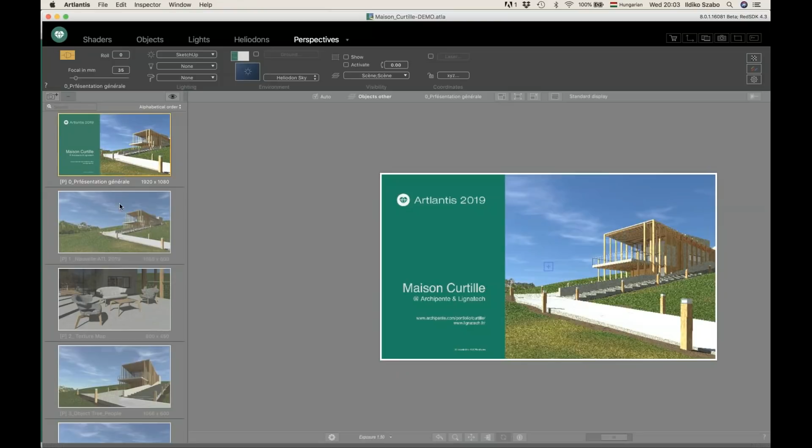So let me switch to Artlantis. Here you have the same house in a beautiful environment. So anybody just sitting on this terrace can admire this landscape. Magnificent mountains are surrounding the house. So here it is, our building that helps us to generate the presentation, and first of all, to speak about the new features of Artlantis 2019. So my presentation will focus on the novelties first of all.

So the first and very important novelty is the name change. And what is behind this name change? Because so far we always said that Artlantis is a product line composed of Artlantis Render and Artlantis Studio. Now these two products were merged together into one single product, which is called Artlantis 2019 and groups all the power of these two applications.

What makes it different, let's say, is this little list we can roll down with the different presentation types we can do. And here we will find all presentation types, starting from perspectives, parallel views, panoramas, VR objects, and animations. You may note a new inspector called Insertions, because the site insertion tool was reworked again. It got a separate independent palette as an inspector, so it will have its own content. I will present it to you later on. So this is Artlantis 2019, so let's see what novelties it brings to us.

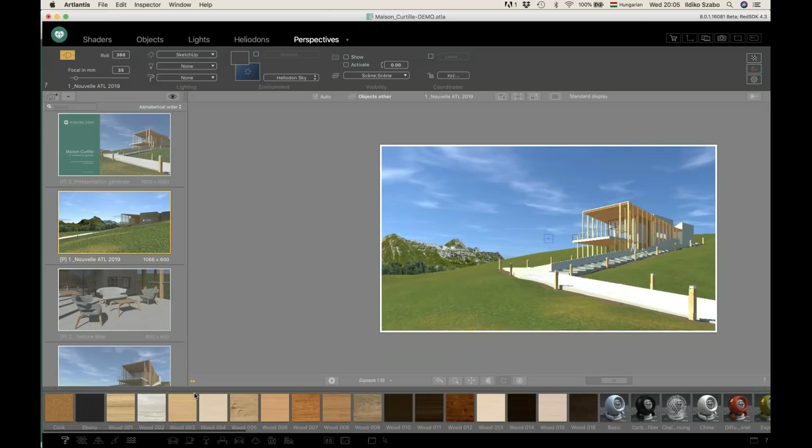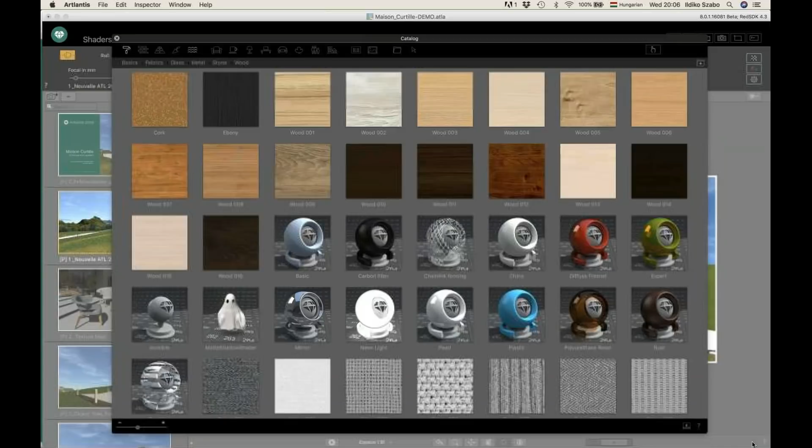Each version has a core feature, something that developers are focusing on, and this time it was the catalog, the library of Artlantis and the content of this library. So let me open the catalog first of all. Let me enlarge this little window and I start to browse it. This is the basic library. And what I'm browsing here is the standard library of Artlantis 2019. So I will enlarge it even more, open it in a separate window to let you see more of this content.

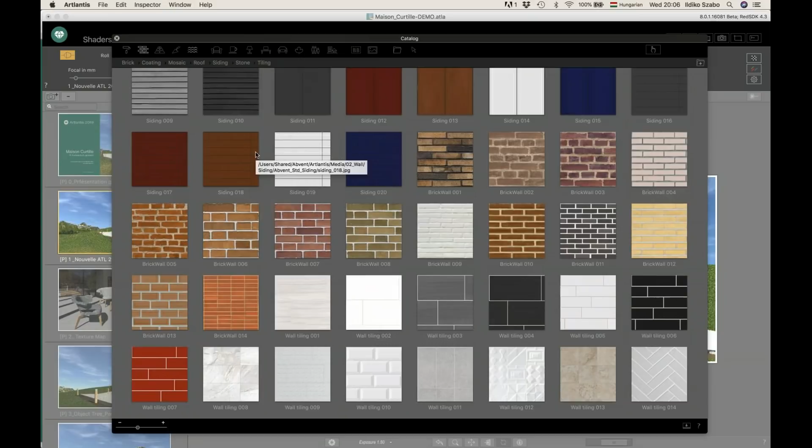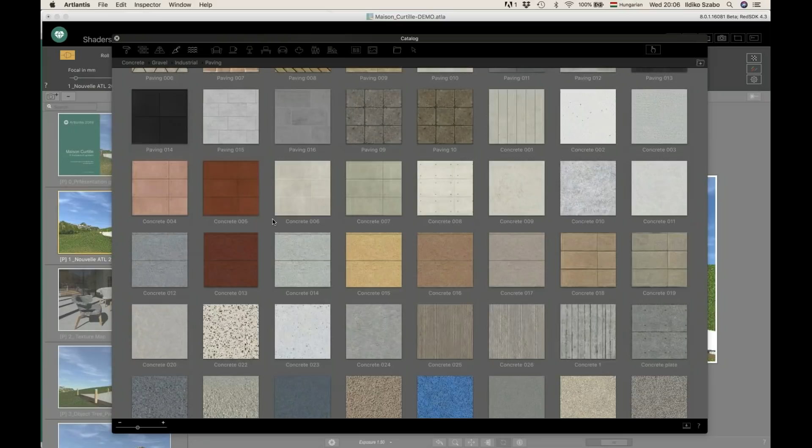And just to repeat, this is the content of the standard basic library. So whenever you download the fully functional trial version for 30 days, it will be the content you will have access to. So this is the content of the default library of Artlantis whenever you decide to purchase Artlantis. This means that altogether we have about 1,000 library parts, which is an improvement of 40% compared to the previous version. So let me compare it.

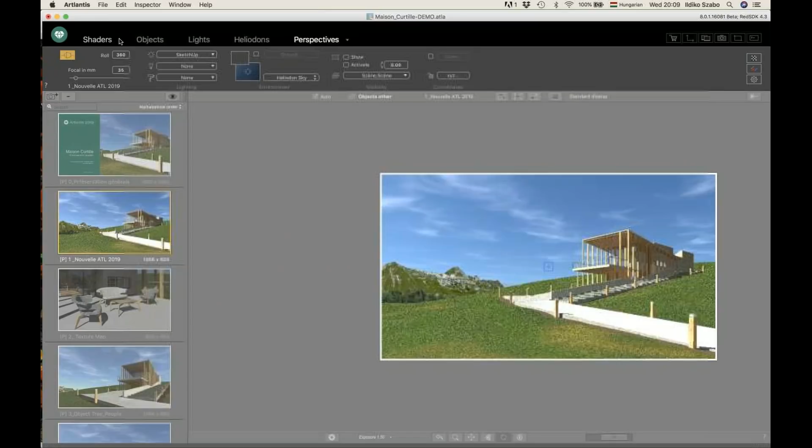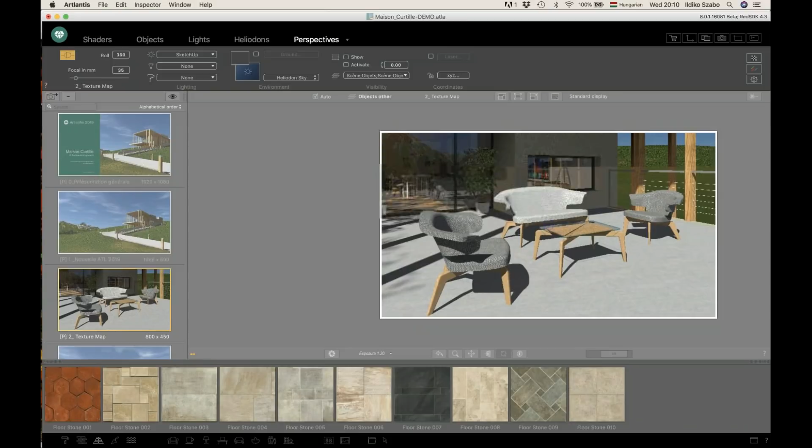So let's see what Artlantis provides to us and how it works. I'm going back to Artlantis. I will close this window of the catalog. However, I will keep the catalog open at the bottom, choose a different scene, the scene of the terrace, and open a category with some shaders we can map on surfaces like this terrace, and open the inspector of shaders. And of course, to apply the shader, it's a simple drag and drop.

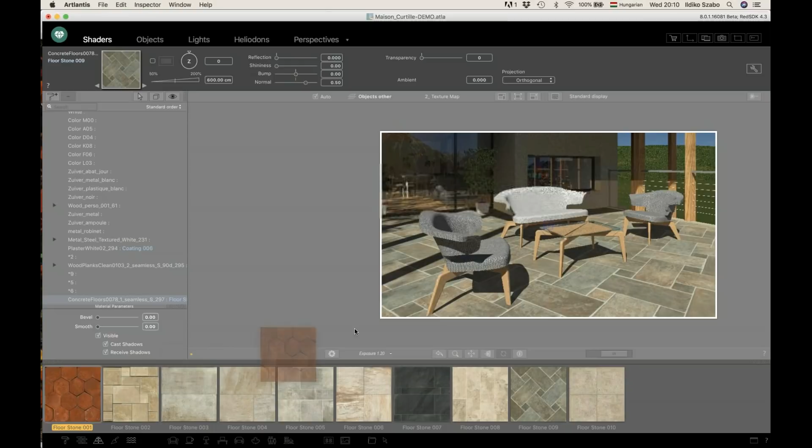It is mapped on the surface. I can do a different shader. The quality of the shader is the most important here, because if we check the inspector, nothing has changed. The settings are the same, and there are no extra settings to see. But the quality of the shader was reworked, and now they are much more realistic and look better in our rendering. Only those shaders which have a texture map for the diffuse were subject of this development job.

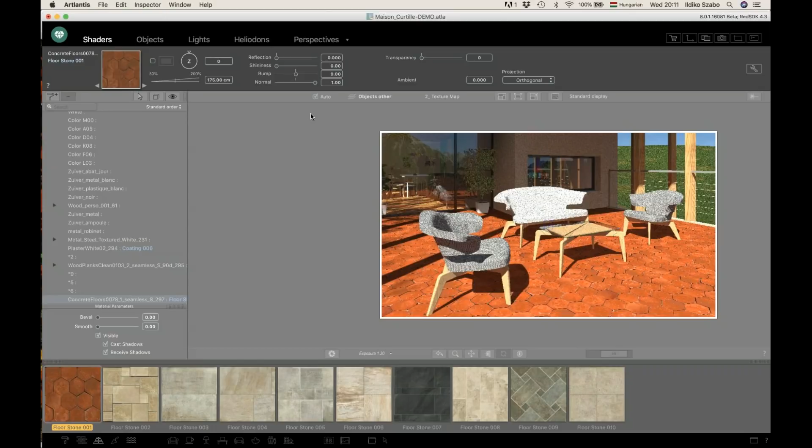It means that all those shaders being a combination of colors, the so-called procedural shaders like the glass material or the basic shaders, or think of a certain aluminum or whatever, those weren't changed. Only those having texture maps for the diffuse, and of course different combinations of textures to generate different maps and different settings, were reworked for this version of Artlantis. And after presenting the shaders a little bit, the next topic will be about the trees.

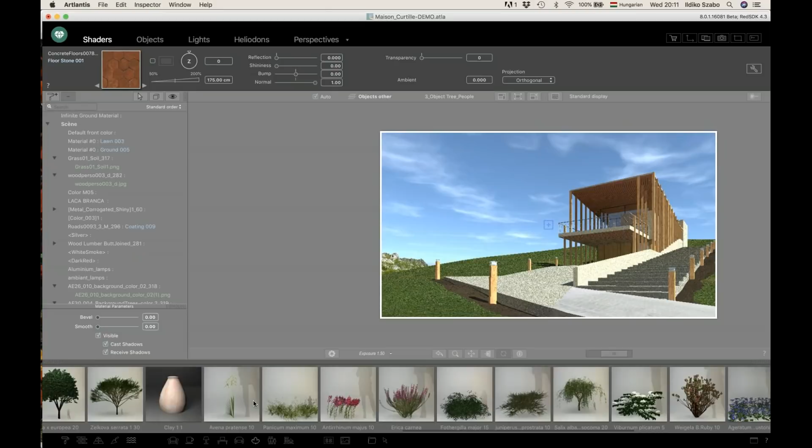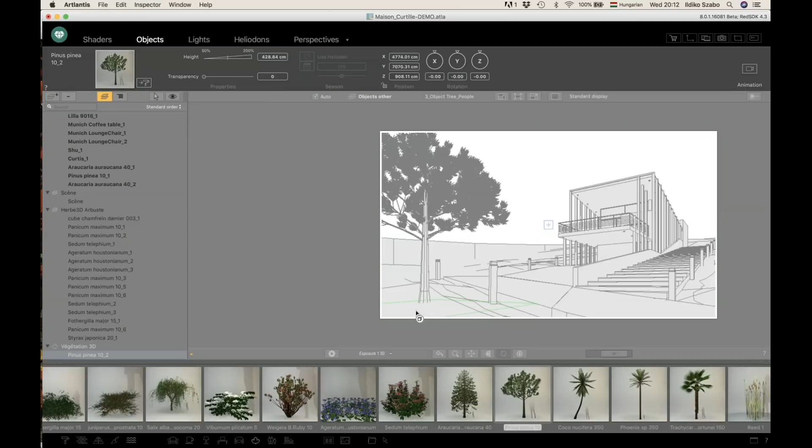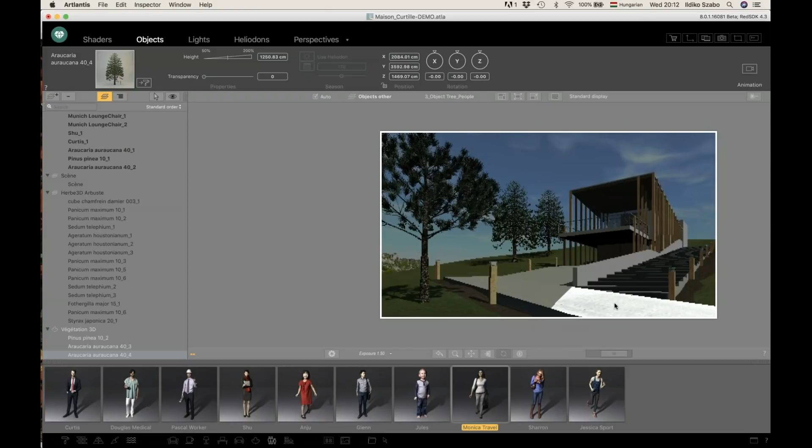I will open up now the catalog, the standard library of plants, and open the inspector of objects. Whenever I'm dragging and dropping an object into the scene, the inspector will feature the settings, and these features didn't change at all, because the object itself was reworked, and it is now more lifelike, more realistic. So I can simply add these trees, or I can add even people, enhancing quantity and quality. The section with people, the same. And the people are now high quality, nice persons belonging to AXYZ.

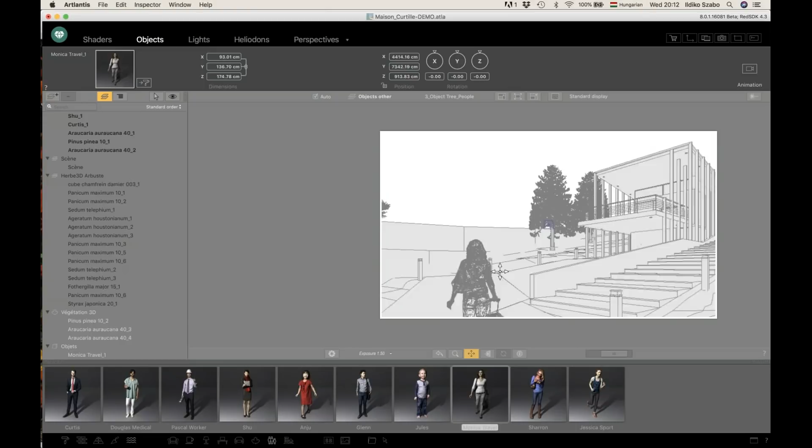Just trying to find a camera view where we have a closer look at this lady to show you the way she looks, her geometry, the texture mapping on the lady. It's a nice person that looks realistic in our scenes. So this is about the content, about the library parts one by one.

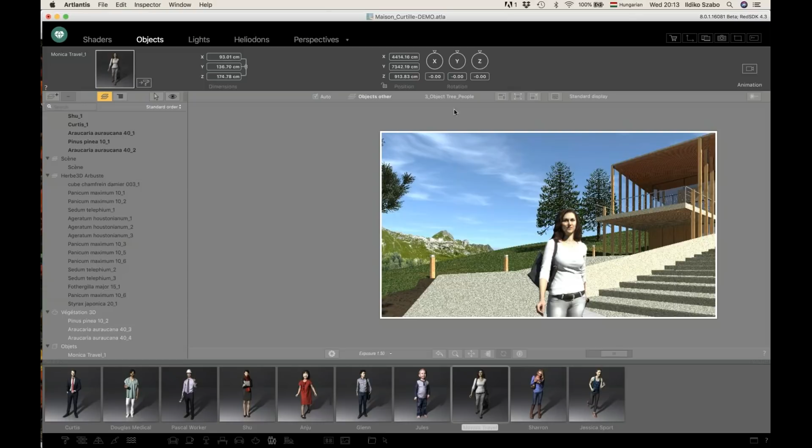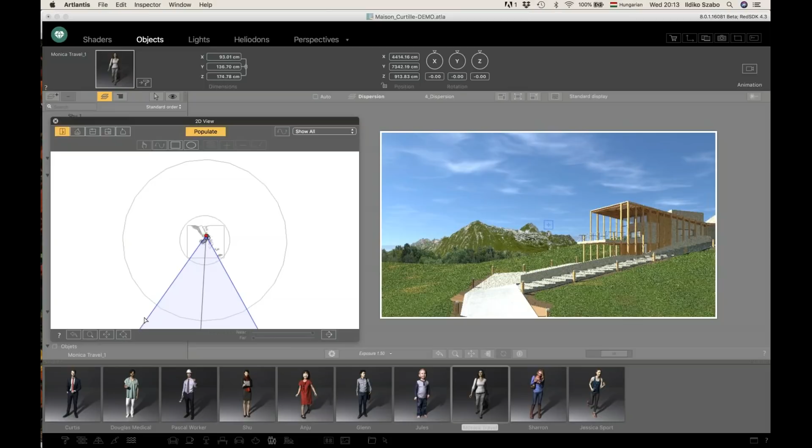And now let me show you a feature that is also linked to the objects, to the way these objects can be distributed in a scene. For this reason, I will open the 2D window and show you the feature for distributing the objects, called Populate. It's an icon that should be activated first of all, and when it's activated, a list of icons will appear below this feature. So what shall I distribute for this scene? Some plants first of all.

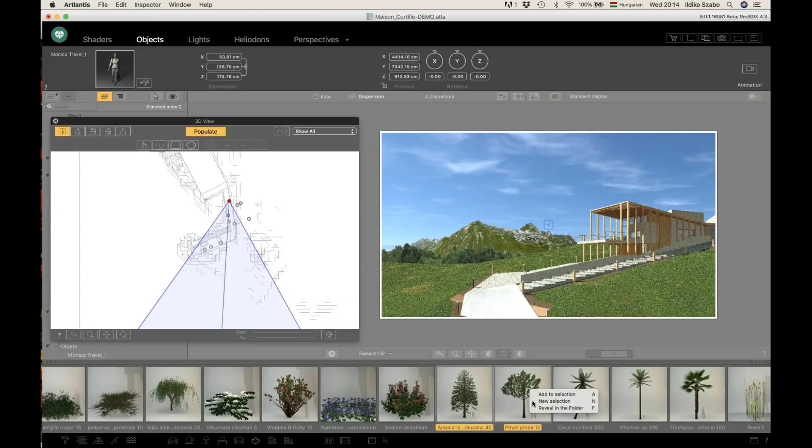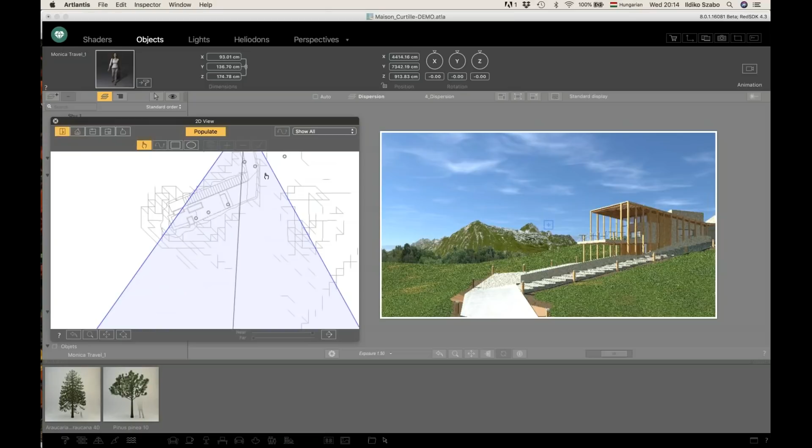So let me go into the plants section of my library and search for some pine trees. These are more appropriate for this region. Select from my library, create a new selection. So here it is, my selection with these two plants, and with the help of the Populate tool, I have multiple possibilities to distribute these objects in my scene. The first one is a finger. Let's choose this. It means that wherever I'm pointing, one of the selected items will be added to the scene.

I have the possibility to generate a spline. The spline is a curved line that I can edit, and then I can follow whatever path I would like, along which I can distribute these objects. I can have a rectangle, oval. Let's go for this shape that can be edited, changed. Now I'm looking for a shape like this, positioned in this way, inside which Artlantis already suggests a number of copies.

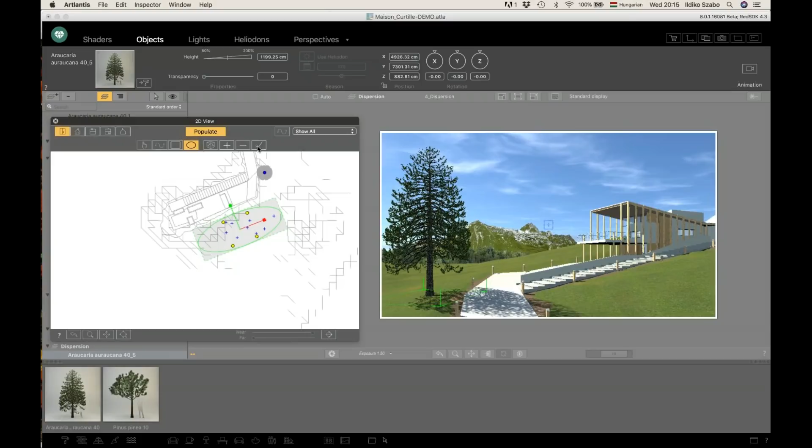I can add more copies to this. These blue crosses represent the objects I'm adding to the scene. And if the distribution doesn't suit me, then I have a dice. I can reorganize them and click OK. Let's go. And here are the plants appearing in my list.

Okay, let's delete the one that's not set correctly. So this is the populate tool of Artlantis.

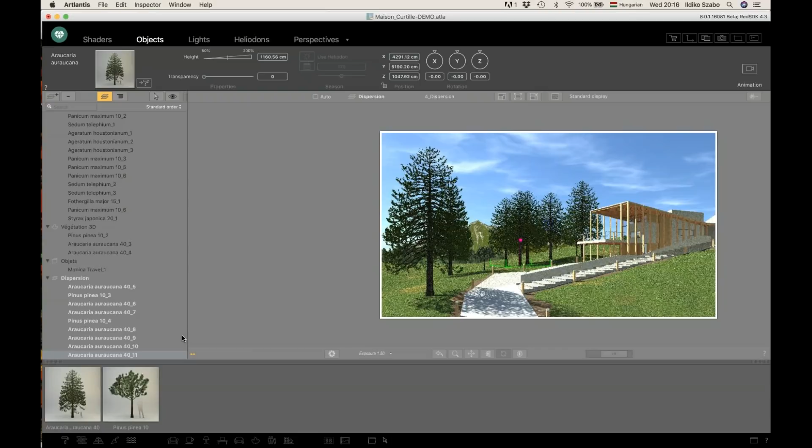You can use it to distribute whatever object you wish in your scenes. And now the so-called 3D grass, which is part of the category of shaders featuring natural surfaces.

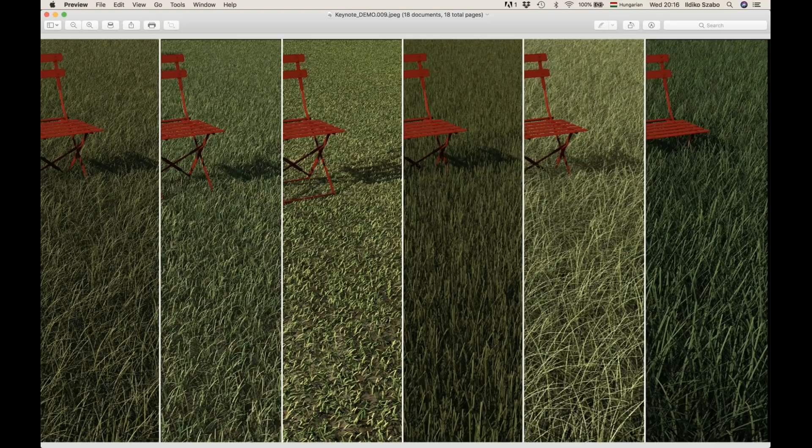Here there are 6 different types of grass we can map on any type of surface. Let me show you the way they look in a final rendering. So here are the 6 different grass types rendered separately. You can notice that the height of the grass is different.

Because there are different types of grass, you can name it, the color and the shape and so forth, the type of it. When you drag and drop it over a surface, you will be able to manage the height of the grass, so two settings only, the height and the kind of fall off. Depending on the distance from the camera, you can simplify with this fall off the calculation of the grass.

So it's very simple. The reason why I'm showing you renderings with this 3D grass is that they cannot be displayed in the preview window. They cannot be previewed actually. Whenever you drop it over a surface, you will see even color, nothing more.

Just to spare computer power, we decided not to show the 3D grass in the preview. So therefore, the preview will keep the speed of refreshment. However, in the final rendering, you will see the grass nicely calculated, like in this scene.

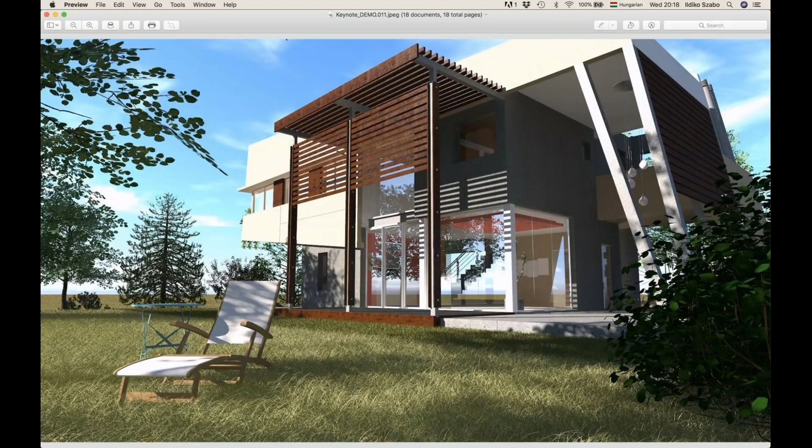Here is another example with this 3D grass in the courtyard, close to the camera in front of the building. So the 3D grass has its own role whenever we need some details in front of the camera. This is to avoid putting it on large surfaces that can even charge too much the calculation afterwards.

So it really is a very realistic, nice feature that provides finally the most expected, anticipated 3D grass, and the way it was anticipated. So we are really happy to present you this 3D grass.

And if you take a look at this rendering, the whole plants are coming from the standard library of Artlantis. Maybe you remember those lime trees, which had very whitish leaves. They were too shiny even. They also are part of the standard library, but in this reworked format.

The flowers, the different plants here and there are coming from this standard library. So you are welcome to use it to set up nice scenes for yourself.

And with this, I'm closing this big chapter around the catalog. So we spoke about the quantity of the catalog and the quality of the objects, and even about the feature, how to distribute these objects in our scenes.

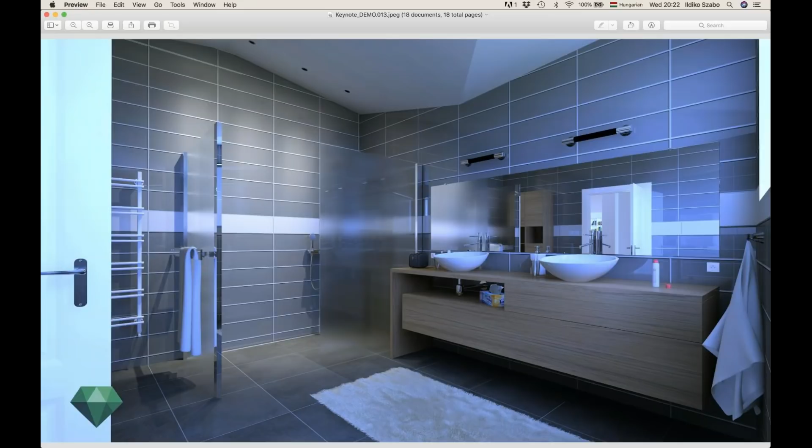So let me switch back again, now that you know what it's about, and maybe you have a better way to understand what to look at now. Here is Artlantis 7, which is a bit dim compared to Artlantis 2019, where each surface having its own texture, the contrast of the image is more improved and it's more realistic.

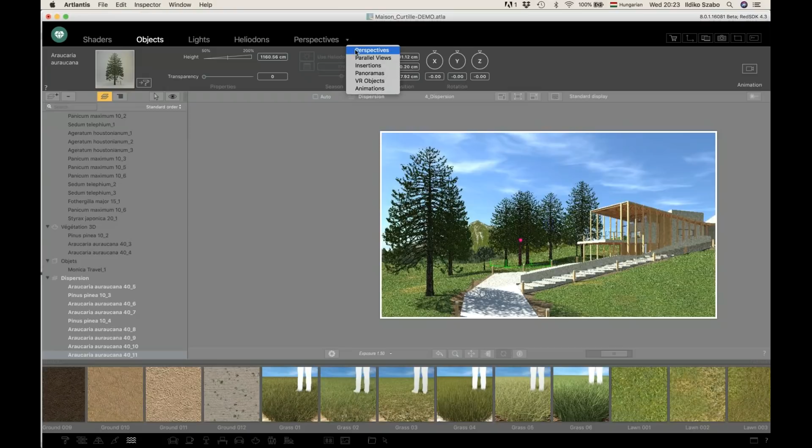Okay, let me go back to Artlantis and continue the presentation with the so-called site insertion. So I'm rolling down this little list here, and among the presentation type, now I can choose site insertions. This is the name of this new inspector.

I will close the catalog. I don't need it actually, because we will concentrate on the new reorganization of this existing tool in Artlantis, which is still about the same question. My little building, I work on it. I'm very anxious to make it nice and good in all its details, and wow.

However, the clients are very curious how this building will look in its future site. Therefore, this site insertion tool of Artlantis would like to become even more handsome and easier, to make these site insertions lighter for us.

The inspector has some tools which can be retrieved on all inspectors. We can customize our insertions based on light, choose an existing sun type, artificial light, and so forth, activate or hide some layers, organize objects, and activate the infinite ground.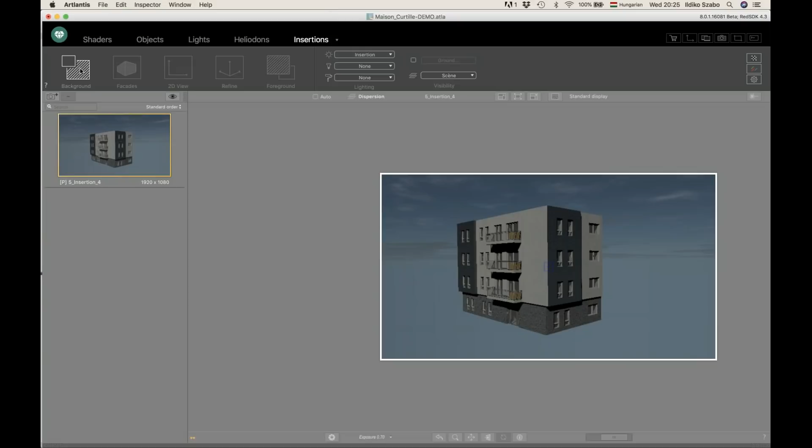So far, we know this. The new part of this inspector is this list of icons, from which the first one is active. This is on purpose, because the developers and conceivers of this interface would like us to follow a certain logic, and the first icon is where we should start.

This icon will ask us for a background image. Let me browse my hard drive for a background, a photo I took with any camera, mobile device, telephone, whatever. It can be an average JPEG, and I need it entirely.

We shouldn't crop it, because even the proportions of the image are taken into account. So let me apply it as a background. Automatically, the adjustment, the proportions of my preview were stretched to match the proportions of this background.

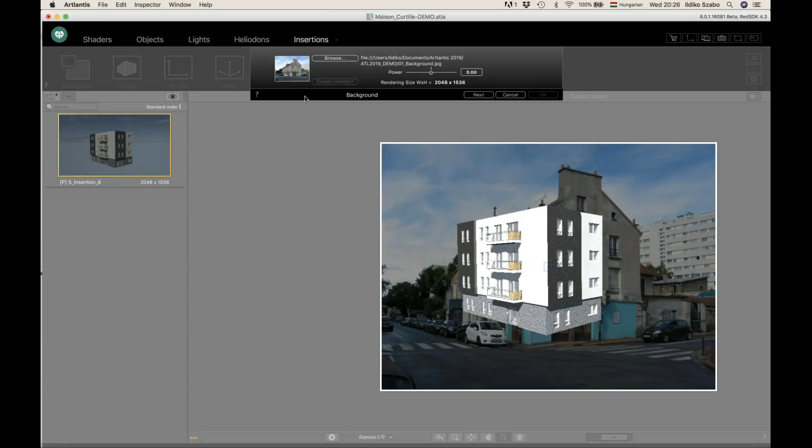So some automatism was added. Every feature that so far we had to click separately is now applied automatically, having its own separate inspector. It can become an automatism.

We can still continue to work out the color, I mean the brightness, of the background. And if my photo contains enough metadata, then this 'create heliodon' icon turns active, and clicking on it will generate a new heliodon in my list of heliodons, which has the same position in the sky and hour of the day set automatically, like in my photo.

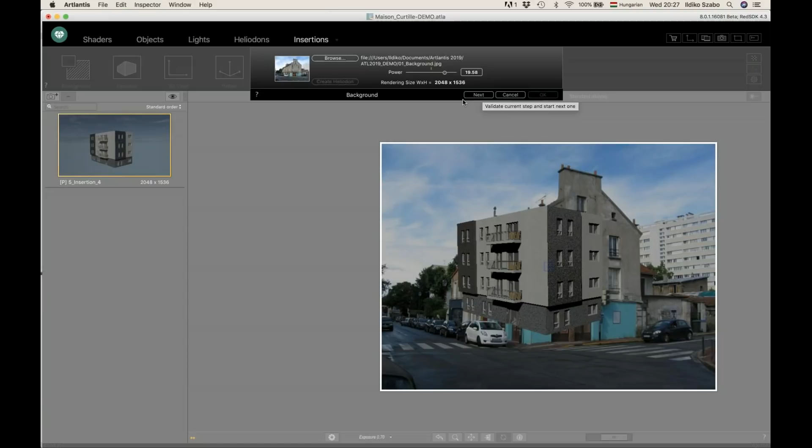That makes it easier to let my model end up looking exactly the same way as in my background photo. My possibilities in this palette dialog are the next button and cancel, so I'm forced to go to the next tab. The next step is to set the XYZ coordinate system in the preview.

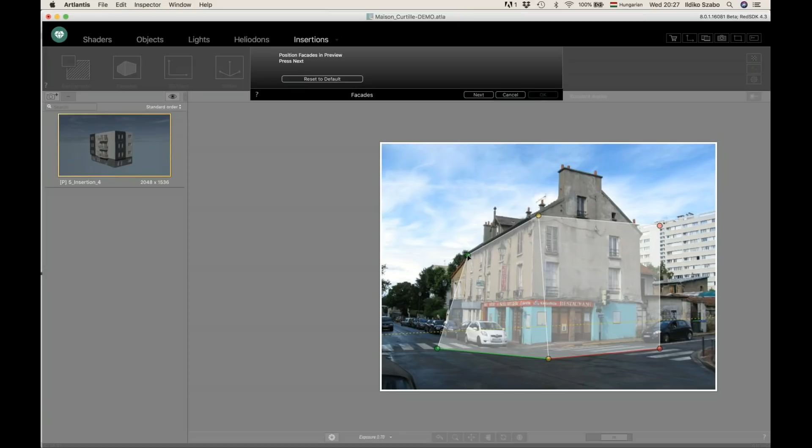To make it even simpler, there is a kind of net to position the origin point, which I can retrieve afterwards in the 2D window. With the help of this net, I'm just trying to fix a kind of bounding box for my building.

Over the perspective lines of this background. It was done, that's all. What shall I do next? I shall continue. Next, the 2D window opens up automatically, where I also have the XYZ coordinate system.

Let me get closer to the model. What I shall do is position it and rotate it exactly the same way as in my preview window, where I have clearly visible the XYZ axis.

And of course, I have to check the positioning of my coordinate system in all views, at least two views, to make sure that it's positioned at the same level, the origin and the rest are also fine.

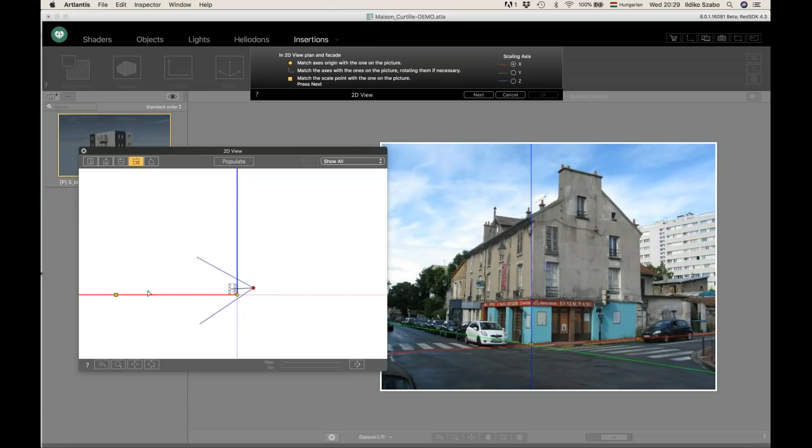The list in the dialogue helps me. If I'm lost, I should read those little explanations here. And what I also shall do is choose an axis, helping me to scale my insertion.

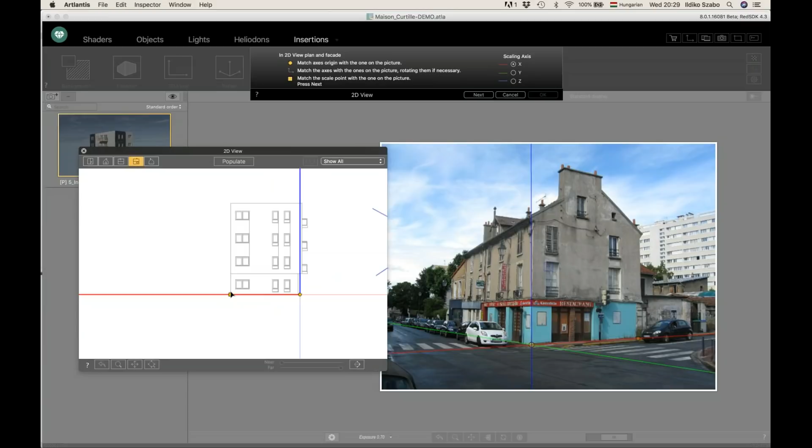So here is the length of the facade, which I can easily retrieve in all views. I will position it here. This is the 2D window. It's done, I can even close my window.

And in the preview, I'm checking the same yellow dot, and then all is done. I continue with the next button, and automatically the positioning of my model starts. So the two coordinate systems are overlapped, and with their help I can retrieve the position of the photographer and assign it to the Artlantis camera as well.

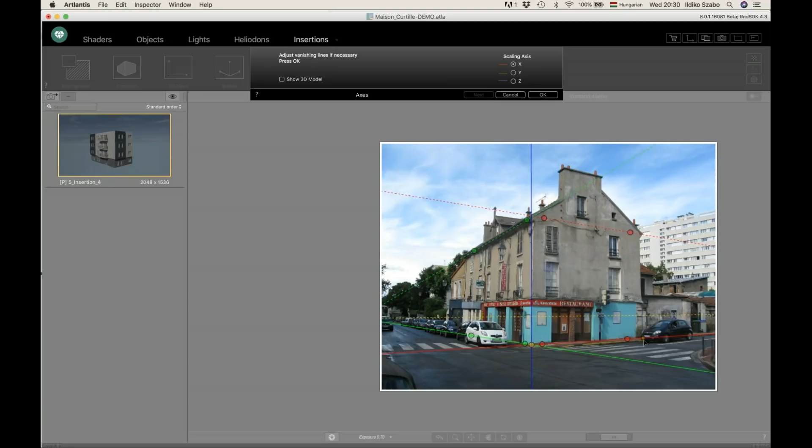If I want to fine-tune anything, I can mask the 3D model and make any change. I already have some perspective lines helping me fine-tune the position of the axis if needed, and then repositioning my model.

If I consider that all is fine, I close the palette and the site insertion is completed. If I check the icons in the inspector, all of them are active now. I can go back to any of these palettes if I want to rework any details. And the last icon is active as well, which is about the foreground.

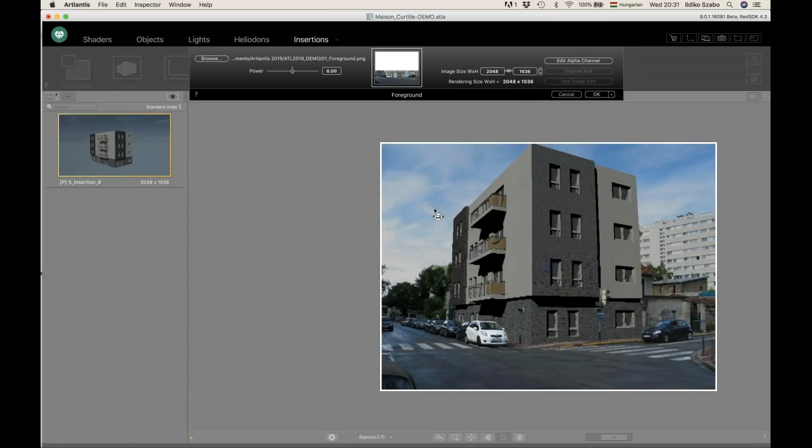So definitely I would need a foreground because some elements like these cars are cut. I browse and choose a foreground which was prepared based on the background with an alpha channel. I apply it in front of my building, click OK, and this is the last step to do for my site insertion.

So it's easy like this, and these steps I have to follow will guide me through the necessary settings I have to do. As you see, having independent inspectors, some elements turn automatic, so with less clicks I can achieve nice results.

It's under construction, and this is how it looks now on the construction site. The particularity of this building is that it's a completely wooden house. All the structure is in wood. Only the staircase has concrete elements, and the ground floor is in concrete.

All the rest is in wood. Apparently Artlantis 2019 is under the sign of wood constructions, because the building I used for the demo is also in wood. Since this building isn't finished yet, we did a site insertion using this new site insertion feature, and this is how the building will look when finished. So this is the last rendering.

I find this rendering already very nice and realistic. We are always looking to have a realistic result. This is the rendering you can also see on our website—it's already a nice rendering. Whenever you have it, there is a post-process feature. Let me go back to the perspective views and choose another view. The post-process palette is here, you can open it, and there is a kind of depth of field just to blur. Maybe this is the question, because everything is very clearly visible, even at a long distance.

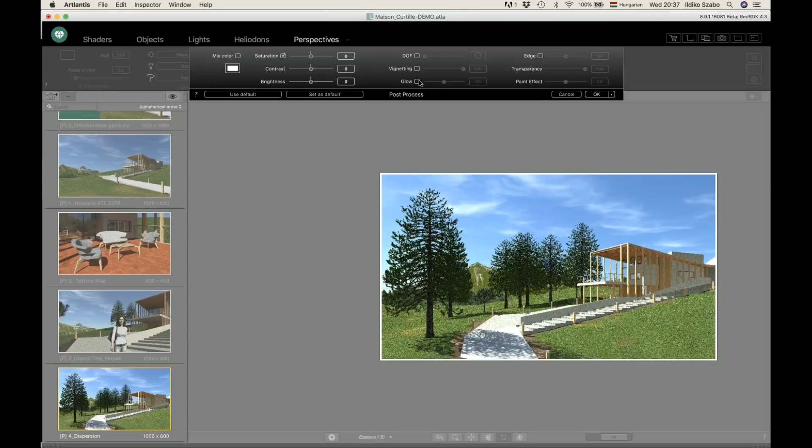However, in reality, the air is not so clear all the time—there are particles in the air, so it will mask and make dim some parts of the view. So this is the kind of depth of field feature we can use from inside Artlantis as well. Or you can render in Photoshop format and use the Z buffer layer to generate this gradient for your scenes, to make it less clear, to blur it a bit. I hope I could answer your question.

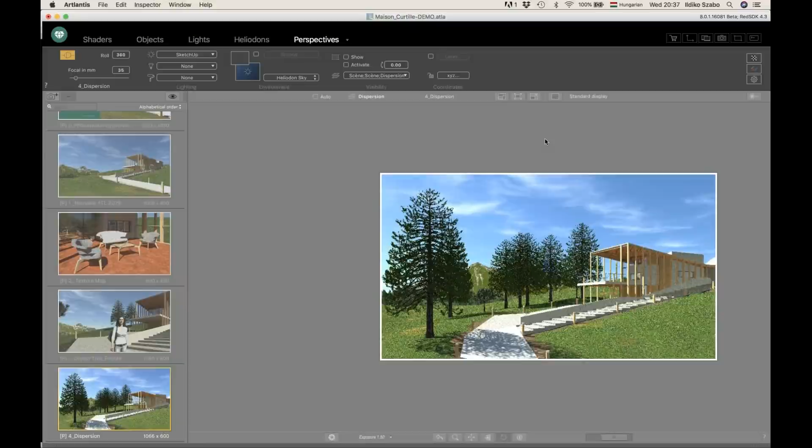I think so. He says yes, maybe the bathroom rendering needed the glow feature together with the depth of field aspect to make it less harsh. And you answered perfectly, that's what Nick says. Cool, thank you Nick for your feedback. Feedback is always priceless in any of these live interactions. That's what we're here for.